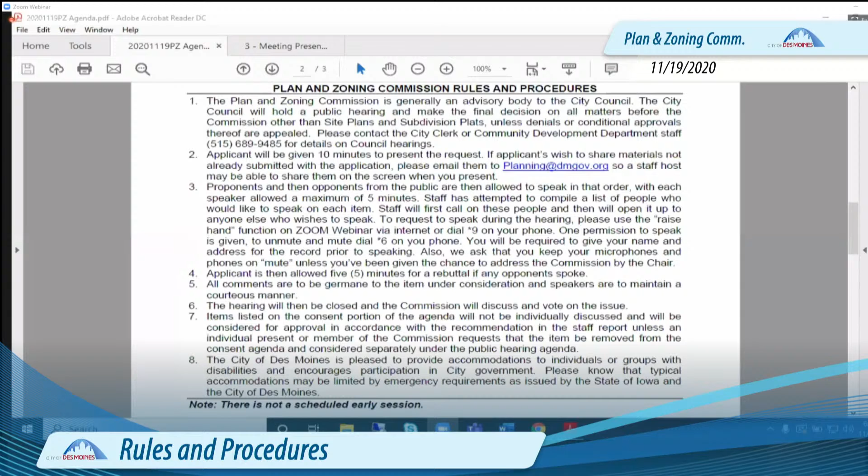Tyler, roll call. Chunga, here. Rocky Sposato, here. Will Page, here. Emily Webb, here. Jan Freed, here. Dory Briles, here. Lisa Howard, here. Carolyn Jennison, here. Steve Wallace, here. Greg Wattier, here. Greg Jones, here. Francis Boggus, here. Caleb Bergson, here. Johnny did advise me he won't be present tonight, so we have 13 members present.

Thanks, Tyler. The minutes—are there any corrections or changes or any discussion on the minutes?

Madam Chair, this is Erik Lundy, Senior City Planner. There's nothing to correct or change this evening. I did want to point out that these are considered site plan items that would not carry forward to the City Council unless they were appealed from the decision tonight. Okay, so that first item in the instructions doesn't really apply to anything on this agenda this evening unless it's appealed. All right, thanks.

Approval of the minutes. Do I have a motion? Do I hear a motion? Jan, this is Abby, I'll make a motion to approve the minutes. Thanks, Abby. Tyler?

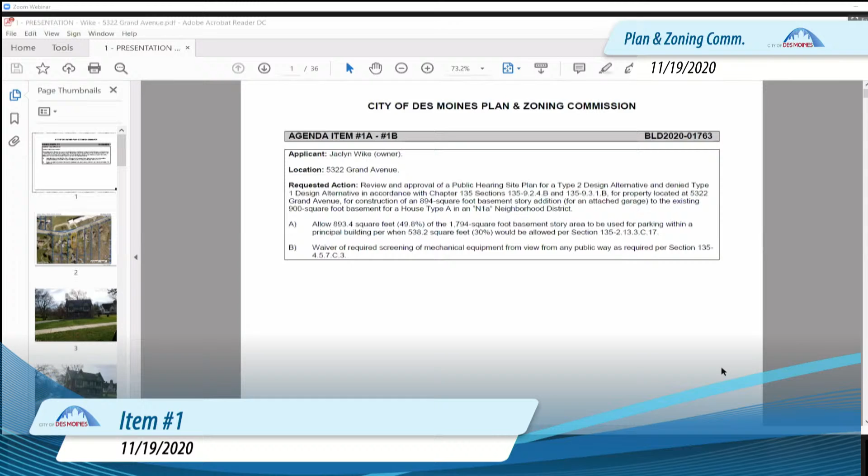Catherine. Thank you, Madam Chair, members of the Commission. Catherine Dreyhaus, planner for the City of Des Moines. This one's a little bit of a brain teaser tonight. The subject property is located on Grand Avenue across from Merrill Middle School. A couple of photos to give you some context. I'm going to speak primarily to the garage addition to begin with. As you can see, the property currently has a deck structure that's also utilized as a carport for the original tuck-under garage. The applicant is looking to replace this with an addition to the rear of the dwelling, which would serve as a 3-car garage as well as an expanded deck structure. And then just the front again, to give you some context.

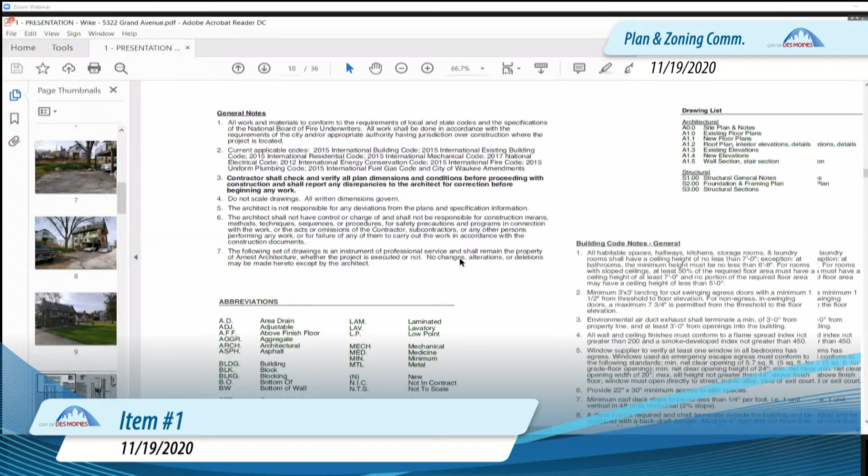I'll zoom in a little bit on the site plan so you can get a better look at that. So here's what's existing. You can see the existing carport, and the gray shaded area, if you can see my mouse, is where they will be putting the addition on.

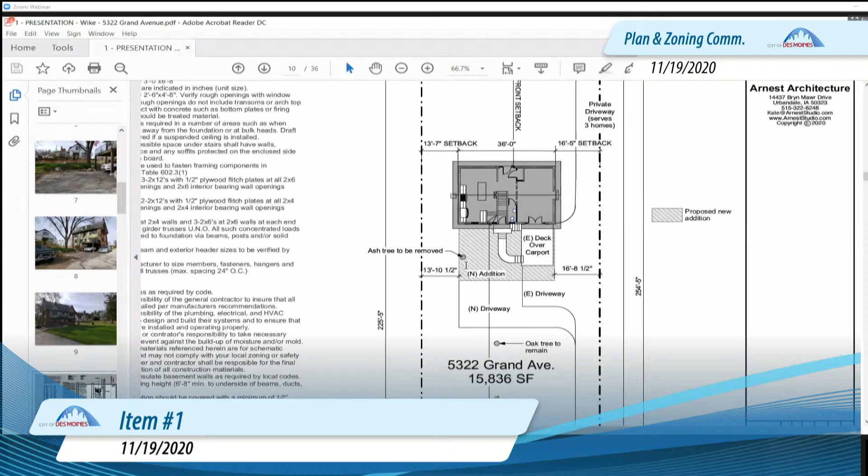Just a little bit more context with the site plan, and some elevations that we received. The brown shaded areas are elements that will be removed. This is the side elevation. You can see through the deck structure here, and what it will look like on the elevation side.

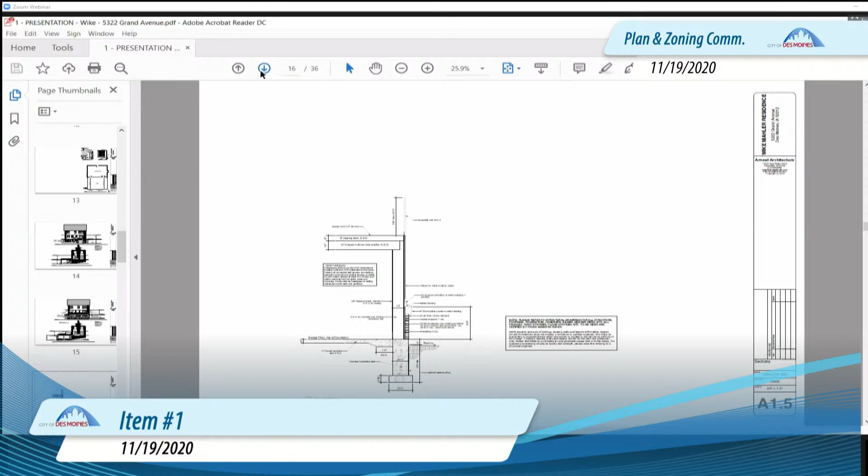The bit about this that's so brain twisting is that as a building addition, it does require a full... let me back up. The bit that's a bit brain twisting is that by adding on to the basement and having the parking in this area, they're looking to utilize more than the total story area of the basement for parking than the code allows, which is 30%. Since they're looking at almost 50% parking, that's well over the 39% that staff is allowed to approve administratively. So that's the large bulk for why it's in front of you today.

Staff is supportive given that there's some topography and existing building issues on this site. We have asked that there would be some planting of shrubs along the eastern facade, which you can see in the side elevation, to soften that edge for other users of the private drive and visuals of the neighborhood. The applicant has indicated that they are comfortable with that condition.

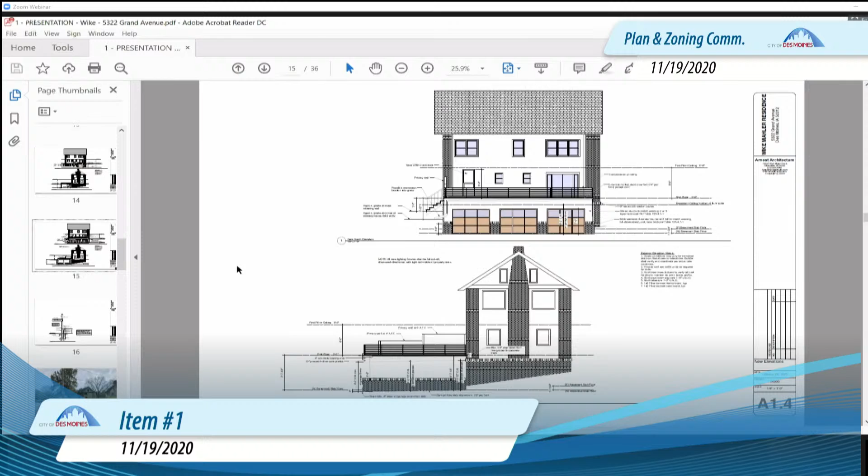The second issue that we have before us is that the code, in this case, is triggering a requirement of compliance for screening of the mechanical units. In this particular case, the AC condenser, which is a pre-existing feature on the northwest corner of the dwelling.

Here's a site photo from the west. You can see that the AC unit is located approximately here, behind the topography on the neighbor's property with a berm and some landscaping. This is just from across the street. Again, you can see the landscaping close up here. This is located on the neighbor's property as well. So you can see that there is some screening, but it is all on the neighbor's property at this time.

So when we went to the planning administrator for a type 1, it was deemed that there is not sufficient landscaping to screen from the right-of-way the AC unit, which you can see right about where the cursor is. Just another photo with a bit of a different angle.

As such, since staff cannot support the type 1, we are recommending denial for the requested waiver for the screening. So again, to reiterate, we are recommending approval of the garage addition with the condition of planting shrubs along the eastern facade. There were a couple of type 2 alternatives that you can read on the screen, and we're recommending denial of the requested waiver for the required screening of the AC unit.

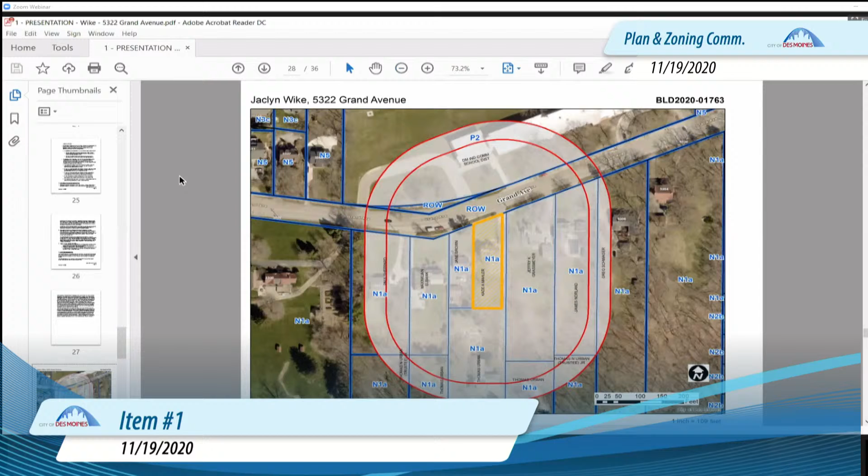And then we did not receive any communication back from the notification area. I would be more than happy to answer any questions that the commission might have for me at this time.

Questions for Catherine?

Okay, is the applicant online? Please state your name and address.

Yeah, this is Cade Mahler and Jaclyn Wike, my fiance. Our address is 5322 Grand Avenue. Good evening, appreciate your time this evening.

So yeah, the house was built in 1923, and it has a one-car garage that is essentially part of the existing basement. And then the carport, the carport is actually starting to crumble.

But we like that it serves as a deck and want to keep with that idea. The nice thing about this garage is the entire west side is pretty well below ground, so it's really just the east side that would have shrubs on it, and you'd have the same facade as the current house with the brick.

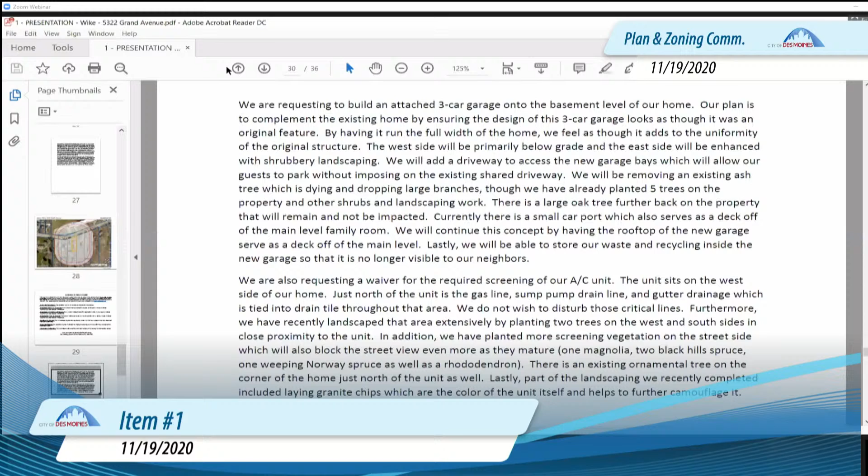There's also shrubs already on that side of the house, so it would just be a nice continuation. Given that we're on a private drive, our cars are always in sight of our neighbors, and we usually have to have guest parking there. This would allow us to have a proper driveway, so we wouldn't have to use that private drive to the extent we currently do.

In regards to the AC unit, in the summertime it looks a little different because there's a nice ornamental tree on the corner of the house, and when it's fully bloomed, you really can't see it.

We just added granite chip rock that actually matches the AC unit color quite nicely, and we've planted a lot of trees. We planted a maple tree in the front, two Black Hill spruces, a rhododendron along the sidewalk that'll get big someday, a magnolia, and a weeping Norway spruce tree.

All of that I just listed is on the west side. Keep in mind those are all young trees that get very large, especially the Black Hill spruce — as that matures it'll actually be up against the AC unit in 15 to 20 years. I get that's a long ways off.

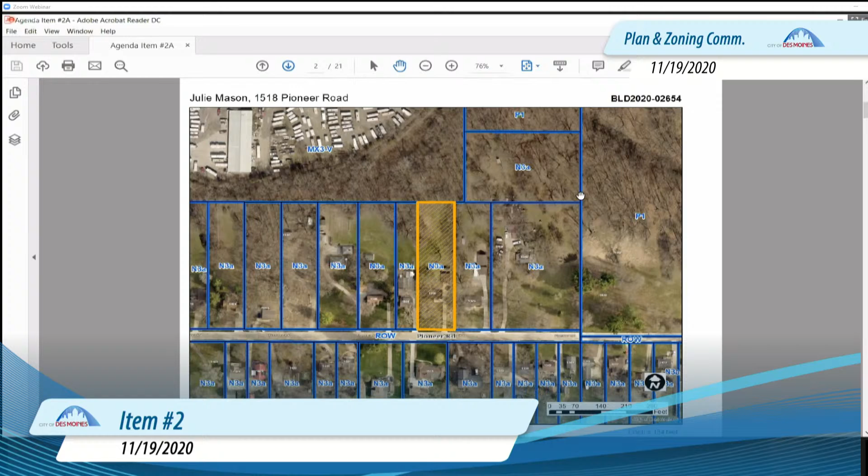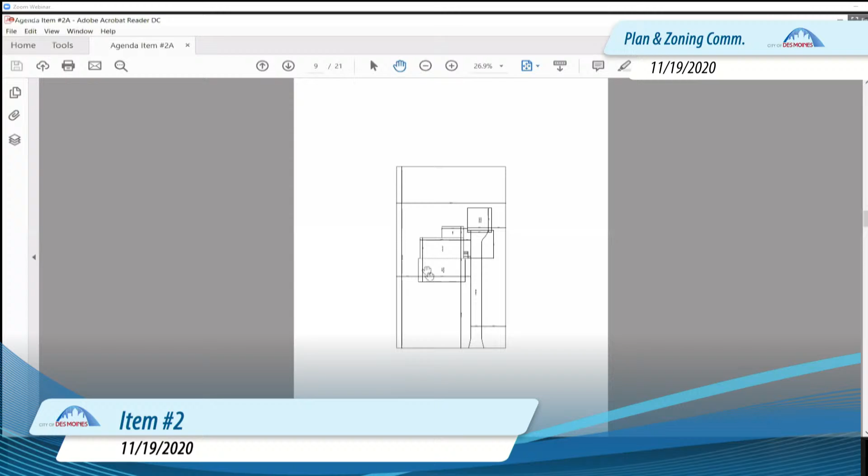So as I mentioned, here are the plans. You can see the existing houses in this area, and this portion to the rear is the addition—just a drawing of the rear. They're not really making any changes to the front of the house. In the floor plans, this line represents the existing house, and everything to the north, or behind this line, is the addition. So they are doubling the size of the house, which, like I said, we love to see people invest in our city.

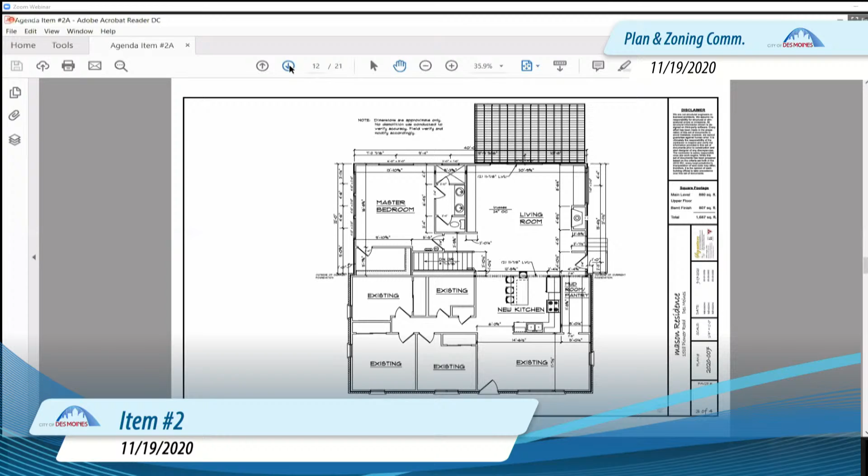We do have a sidewalk committee that started up about a month ago to look at issues such as this, but we've only had one of those meetings, so the sidewalk committee hasn't had an opportunity to present any options or alternatives at this time. So, are there any questions for me?

Bert, this is Greg Jones. Yes, do you hear me? Yeah, I can. Yes.

Does the city have any plans in their sidewalk scheme to put sidewalks on Pioneer Road? Not that I'm aware of. No, I don't believe this is one of the priority areas the city's getting to in the short term. Right, exactly.

I'm not sure where that leads us. I think walking is really important, and giving alternative forms of transportation other than the car is important, and that is reflected in our city's plan, and we need to support that. Other than a huge amount of city money going into putting sidewalks everywhere, I'm not sure how it's going to get done.

Yeah, I appreciate that, Abby, and I agree with you. That's why we've got this sidewalk committee that we hope will help us come up with some kind of recommendations so that we don't continue to do this. And the other thing I would say is sidewalks really do improve values, because lots of people say, especially with kids, they want places where they can have sidewalks.

So, well, okay, we have a motion, and we've had good discussion. So I want to thank everyone who contributed to the discussion.

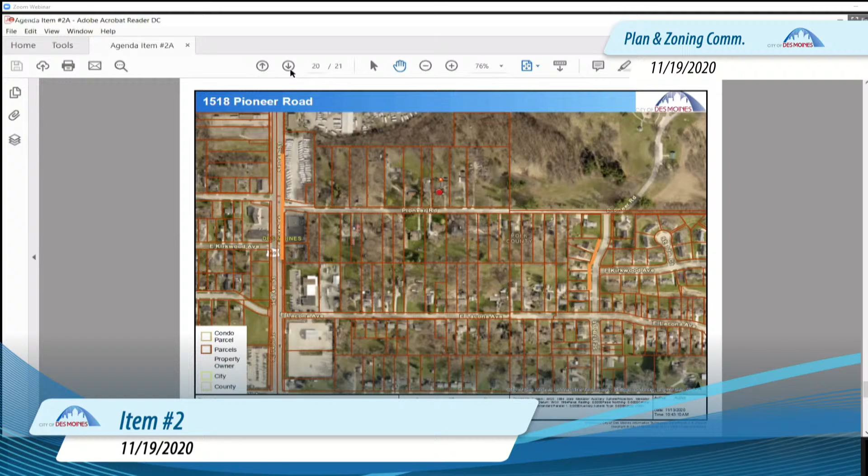Tyler? Will Page, Yes. Emily Webb, Yes. Jan Freed, Yes. Dory Briles, Yes. Lisa Howard, Yes. Carolyn Jennison, Yes. Steve Wallace, Yes. Greg Wattier, Yes. Greg Jones, Yes. Francis Boggus, Yes. Caleb Berkson, Yes. Abby Chungchunas, Yes. Rocky Sposato, Yes. Motion carries 13-0. Thanks, Tyler.

We're ready for item number 3. The applicant is Anto and Sonja Bekic, 4023 Southwest 31st Street. The review of the following type 2 design alternative in accordance with chapter 135, section 135-9.2.4.b and 135-9.3.1.b to allow construction of a 22-foot by 22-foot detached garage within the front yard area, where accessory buildings are only permitted to be located within a rear or side yard per section 135-2.22.1.d.1.

Eric. Yes, Madam Chair, Erik Lundy, Senior City Planner. This is an existing single-family neighborhood, or one household living neighborhood, in the area north of the airport. Another block south of this area would be on Southwest McKinley, just north of the airport. So Southwest 31st Street, where you see it crosses Summit Vista Drive here.

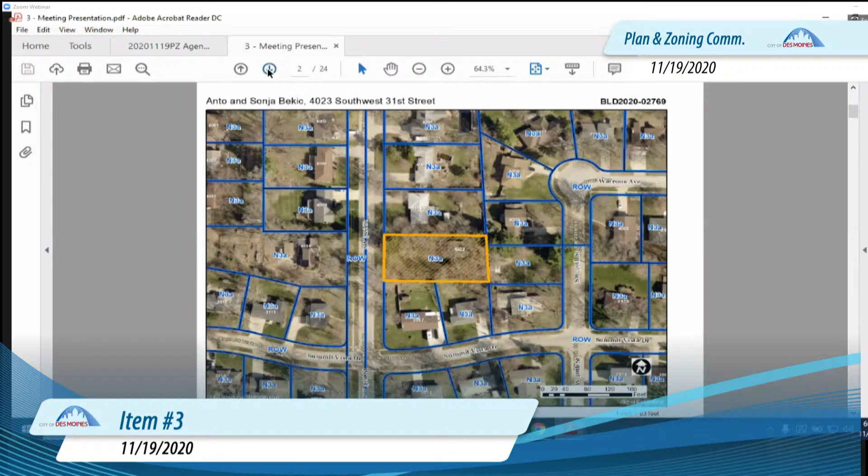A lot of mature trees on this property. You can barely see the house in the aerial here on the northeast corner. The house sets back quite a ways, but beyond the halfway mark of the depth of the lot. It does not currently have a garage. It has a shed. You can see it does not have a paved driveway, but the way the land is shaped for the property, the driveway is most logically placed on the north edge of the property.

Also, the existing mature trees make it sensible, I think, to want to keep the drive access point in this location rather than cutting into the terrain you see to the right. You can see how much more that rises up above the street there. You can see a shed there in the far background south of the existing home. The home was built in the 20s. It has arts and crafts features, wide trim around the windows, somewhat steep roof pitch.

The two fences you see on the right are the backyard fences of properties that front Summit Vista Drive.

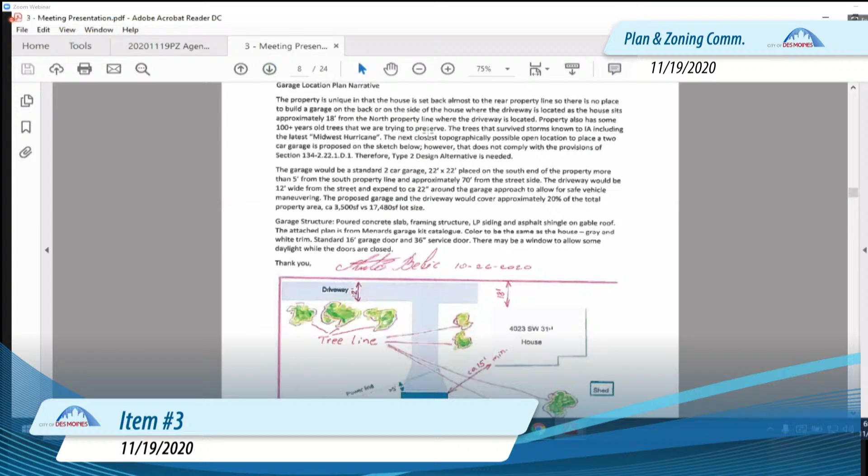This is the schematic that was submitted with the permit application. They are showing the driveway here with a perpendicular access drive then to the garage, which would have an opening facing to the north and not towards the street. So you would see the side elevation of the garage being out in front of the house.

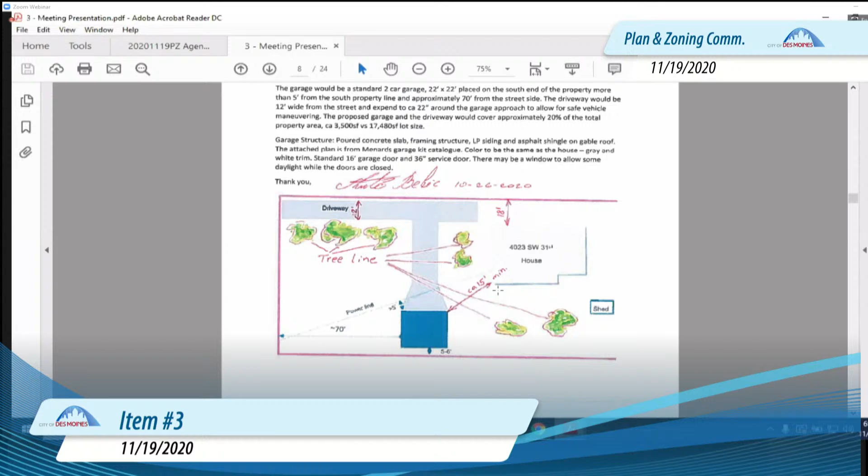Arguably, there's room here for a garage, but again, the terrain works against the opportunity for that, and the removal of the mature trees comes into that equation as well.

That's just a floor plan of the garage being proposed. Would have a pedestrian access door towards the home.

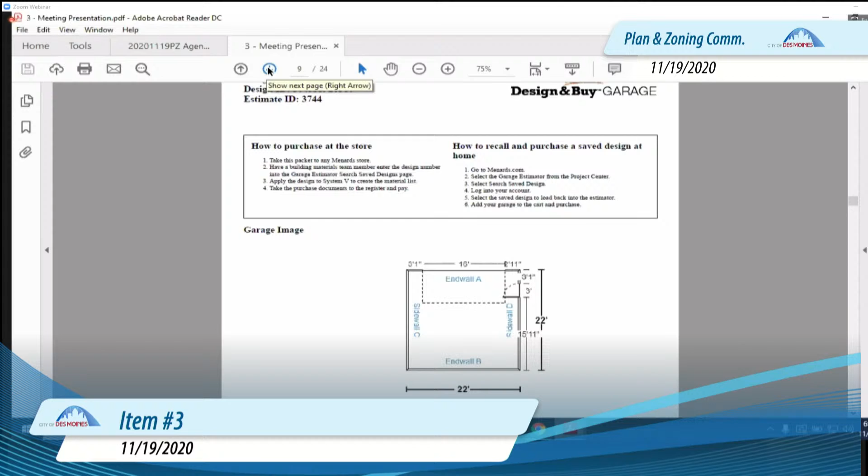A fairly generic set of elevations. Staff believes it should be the LP siding.

Some question about the roof pitch, although if you get the roof pitch much taller, then it starts to get to the point where it might be taller than the house, and that would be another regulation that would have to be considered then in terms of relief of this if the garage potentially ended up taller or as tall as the house.

That might be another appeal that they would have to get into. So I didn't recommend anything with regard to the roof pitch, and it's not an absolute requirement in the code, but there is a standard that it does meet the character.

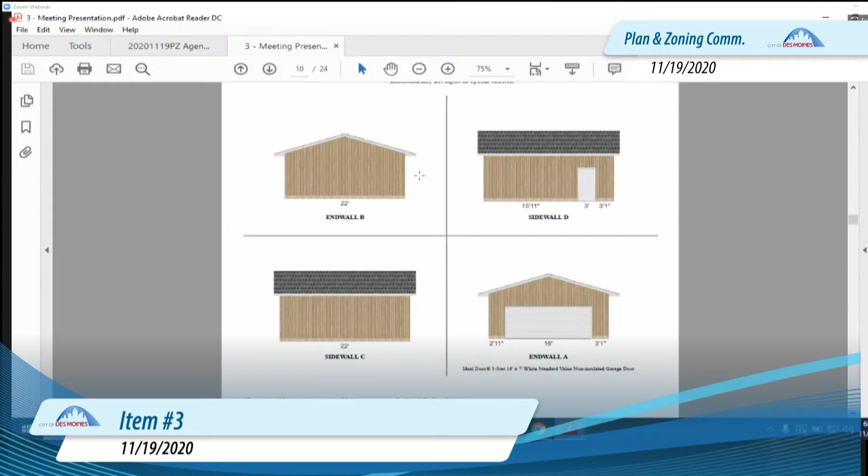You can see that in the applicable requirements. So if the Plan and Zoning Commission felt that was something important to the character, certainly that would be open for discussion for the commission.

Again, you see that the elevations are fairly blank. This shows the pattern of material for the lap-sided material that's being proposed.

Moving to the staff report. One of the things staff really considers here is the terrain and the way this will present itself on the property.

In terms of once you pave the driveway and so forth, it will be better that it would drain to the north and the west into the street versus draining onto properties to the south, for example.

We do want to see some more detail on those facades. They should not be blank from staff's perspective. Therefore, we would recommend that there be windows on each of those walls that would be comparable to what you would have seen in the photos. So proportionate in terms of the ratio.

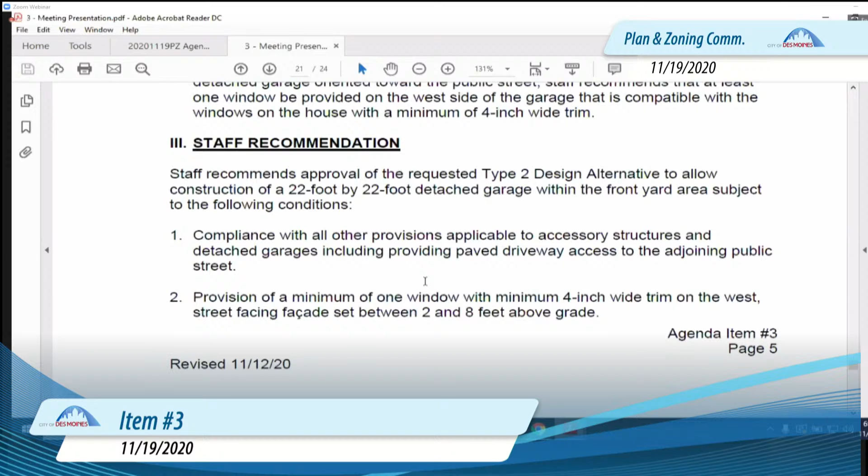Any detached garage setback at least 45 feet from the east of the front, east of the front, which is the west property line, so that the garage is completely east of the front facade of the house on the property to the north. So we don't want this garage projecting into the front yard view shed of that house to the north. We believe this can be accomplished.

And then we want to make sure that there is landscaping provided between the west front property line and the garage to the satisfaction of the planning administrator. We do want to have some low-level landscaping of interest to soften up that as it is out in front of the primary dwelling. So that's where we're at this point.

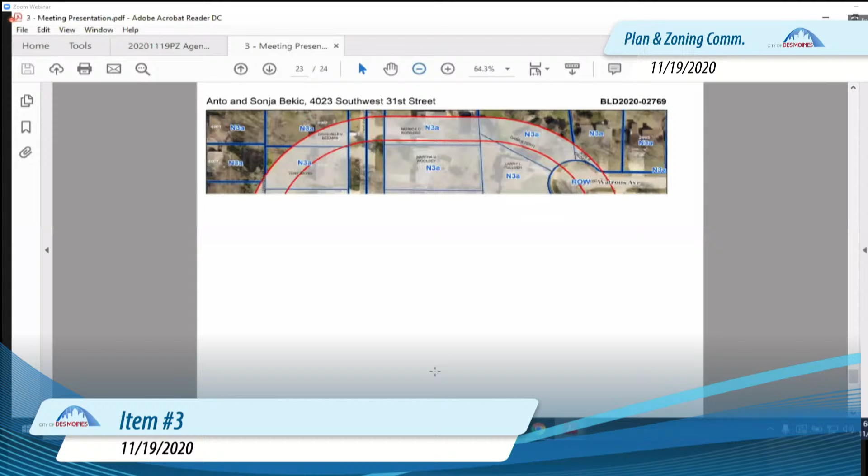We did not receive any written comments in opposition. I've had one phone conversation with an individual I believe I saw is in the group of attendees tonight that owns the property in this area with some concern. So you might hear some concerns from that individual.

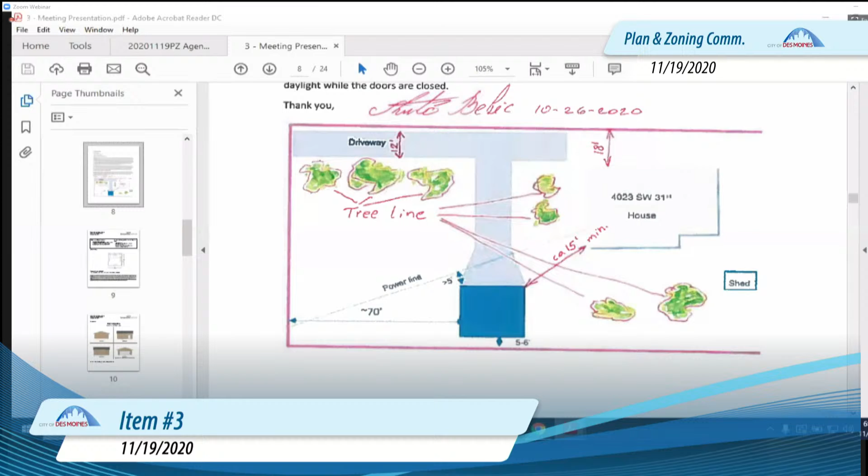That would be more of a concern for Gary's neighbor to the west, and it would affect his house more than yours, but point well taken. I'm just wondering how to address the spilling water on the driveway and potential sidewalk that would go from the service door to the house.

Madam Chair, this is Michael Ludwig, Planning Administrator. They will have to be pouring a new driveway for this garage. I would think the downspout could have a pipe or tile underneath the driveway that connects and runs it to the west or east side of the driveway, whichever it is, to avoid water running across the driveway. Since they'll be pouring a new driveway, it'd be fairly easy to put a drain tile from the downspout to the downhill side of the driveway so the water doesn't cross the driveway.

Thank you, that's a good point. Other comments from the commission for the applicant? Okay, thank you.

It's time to close the public hearing. Time for discussion from the commission.

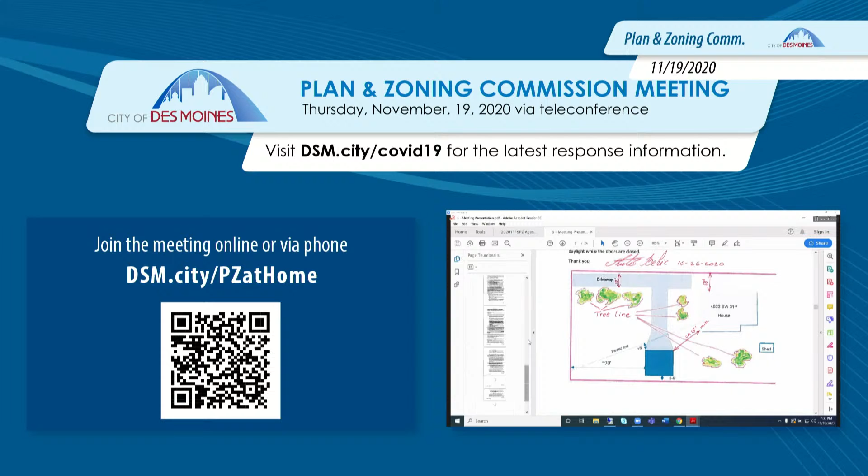Hello, this is Greg Wattier. I think I'm willing to support staff's requirements for approval. I kind of wish there was a little more teeth in there to make the addition more in kind or fitting with the existing home. The existing home has some nice character and proportions, so personally I do think roof lines, roof slopes, and details are important. If the flavor of the board is to add a few more things, I'd be happy to make a motion, but if not, I'm also willing to support how Eric wrote it.

So Greg, did you want to make a motion or do we want more discussion? I'd like to hear some discussion. Okay, other comments?

Jan, Rocky, I'll move staff. Does anybody else want to say anything about this proposal before we have a motion? Okay, we have a motion.

Tyler, roll call vote: Will Page, yes. Emily Webb, yes. Jan Freed, yes. Dory Briles, yes. Lisa Howard, yes. Carolyn Jennison, yes. Steve Wallace, yes. Greg Wattier, yes. Greg Jones, yes. Francis Boggus, yes. Caleb Berkson, yes. Abby Chungeth, yes. And Rocky Sposato, yes. Motion carries 13-0.